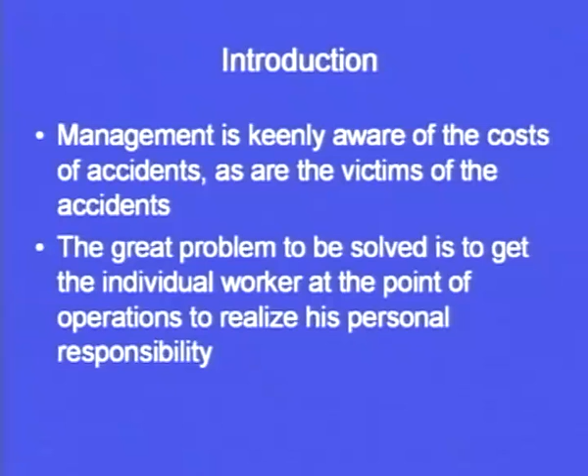There are direct costs involved and indirect costs involved. Whenever there is an accident, the person may suffer an injury, the machine may get damaged. So the management has to do the troubleshooting of the machine, or sometimes they may have to get a new machine. Similarly, they have to bear the cost of hospitalization of the worker. Then there are other workers involved in transporting that worker to the hospital, and in those cases too, man hours are lost and productivity is less. There are other indirect costs also, like the company may have to pay compensation to the worker, or insurance companies may come into the picture. So whatever we have discussed till now, there are costs involved in accidents, direct or indirect, and management is keenly aware of these costs.

And similarly, the person also knows that if he meets an accident, what is going to happen. He may sometimes lose a part of his body, which is completely undesirable from the company's point of view as well as from the worker's point of view. So this great problem has to be resolved. And how can this be resolved?

This can be resolved to get the individual worker at the point of operations to realize his personal responsibility. Although we have started the discussion related to industrial safety by saying that we have to lay out the system in such a way that accidents do not happen, the majority of accidents usually take place due to the negligence of workers or due to failure of equipment. So the first important point is the negligence of the worker.

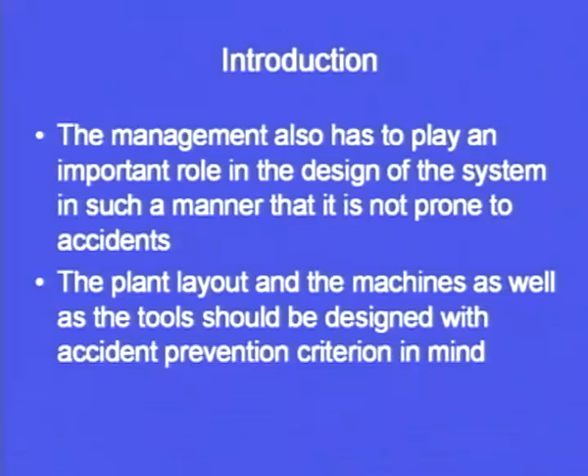The plant layout and the machines as well as the tools should be designed with accident prevention criterion in mind. So we should always design the tools, machines, and plant layout in such a way so that accidents do not take place. In subsequent slides we will see how these criteria can be incorporated into the design. These are simple things, but sometimes we do not give adequate attention to them.

Initially we will see that in a general layout, whenever we are putting the machines and other paraphernalia in place, what are the precautions and guidelines that we should keep in mind. So these are the general principles of a plant layout - what should be kept in mind whenever we are designing a plant layout.

If you remember in one of the lectures on facility layout design, we have seen the different types of layout - there is a product type of layout, a process type of layout, a fixed position type of layout. Also there are certain cells that fall under the category of cellular manufacturing or group technology. So we have seen different types of layouts.

The basic guideline we have seen is that there should be minimum transportation of material within the plant, because it adds to the cost, and as we will see here, it may also result in accidents. So we have to minimize the transportation of materials within the plant. The very first point on your screen: need to keep minimum distances for transfer of materials between plant or storage units to reduce costs and risks.

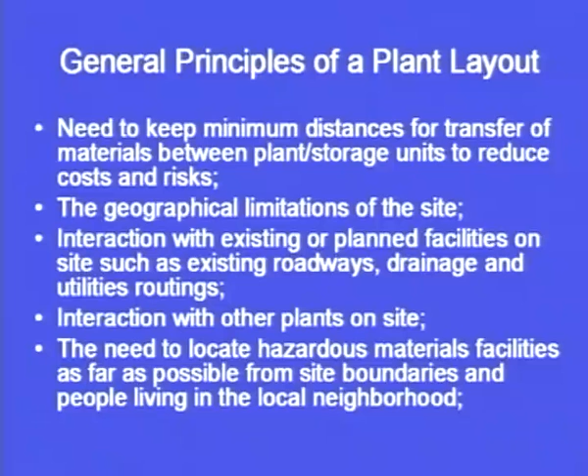Then there is the need to locate hazardous materials. Hazardous materials are those prone to accidents, fire, or explosion. So such facilities should be located as far as possible from the site boundaries and from people living in the local neighborhood. Wherever hazardous material has to be stored, it should be kept at a distance from the existing plant or from the neighborhood.

If you take the example of firecrackers burst during Diwali, these days the government takes adequate steps so that shops selling firecrackers are set up at a distance from the neighborhood or from where people are staying, because there are always chances of an accident or the risk involved is very high. The same principle applies in factories and industries: hazardous material should always be kept at a distance from the plant as well as from the site where people are staying.

Keeping in mind the principles of plant layout, we will further discuss some more important principles, like the need for plant operability and maintainability. We have to keep in mind what the operability and maintainability of the plant are.

There is also the need to prevent confinement where release of flammable substances may occur. Wherever such release happens, there should not be confinement - there should be adequate ventilation and open space so that flammable substances released into the atmosphere can find a path to go out. If they do not get a path to go out, there are always chances of fire or explosion. So wherever there are such chances, we should restrict confinement and make the space as open as possible.

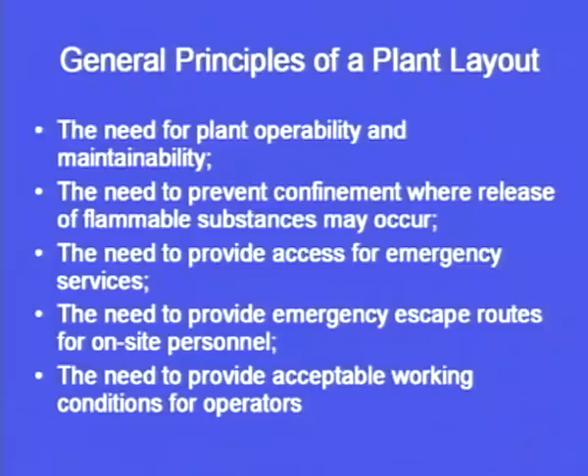Sometimes the humidity levels are very high, sometimes the heat that is generated is very high. So the important point is that the plant layout should be such that acceptable working conditions are provided to the operators. Sometimes the workers have to do some minute task, and if adequate lighting arrangement is not there, the worker may not feel comfortable, and his eyes may not last too long, or his eyesight may get defected or impaired. So whenever the plant layout or designing of the plant is done, this important aspect, the need to provide acceptable working conditions to the operator, should be addressed.

Now from a safety point of view, some important things have to be borne in mind, which we are going to see in subsequent slides. But the important point we have seen till now from the general principles of plant layout is that there are certain guidelines, certain principles. If we keep those principles in mind, then there are chances that the number of accidents that take place in a well designed plant are minimal, or very close to zero.

Now from a safety point of view, we have to prevent, limit, or mitigate, meaning lessen, the escalation of adjacent events, or the domino effect. So basically this point states that if one event happens, it should not lead into another event, and that event should not lead into a third event.

Suppose we take an example of cycles parked in a row. If we push one cycle, the first cycle will fall on the second, which will fall on the third, and similarly the whole row of cycles would be on the ground. We do not want that kind of condition, because whenever an accident, fire, or explosion takes place, it should not spread to other parts of the factory or other parts of the plant. That is the domino effect.

So we have to prevent it, or even if it takes place, we have to limit the extent to which it is going to cause damage. First, we should prevent it from happening. Even if it happens, we have to limit the extent of the damage, and otherwise mitigate the escalation of adjacent events. So if one event takes place, the other event should not take place. We have to put some barriers in between so that one event does not lead into the other.

So we have to ensure safety within the on-site occupied building. Occupied building means where people are present. So we have to provide safety for those buildings also.

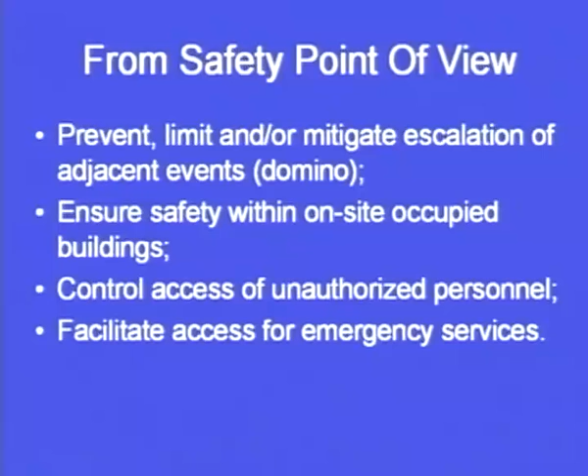Then, control access of unauthorized personnel, which is very clear, that only authorized personnel should be given entry into the plant. Then facilitate access for emergency services. We have already seen that point, that we have to provide access for emergency services. If an accident takes place, we should have an escape route, as well as access through which emergency services can go in, or fire tenders can go in, or the people who are going to take out the personnel from the plant should have adequate access.

Now let's talk about inherent safety, intensification to reduce inventories. So the first thing is we should only keep those materials in inventory which are required.

Sometimes there are certain things lying in the inventory which are not at all required, or which were required at some stage but are not required now. These may lead to certain kinds of accidents. So intensification means we have to keep a focus in order to reduce the inventories. If you remember our lectures on inventory management, excess inventory is never desirable. So from a safety point of view also, the inventory should be less. This is the first point if we want inherent safety in our plant.

Then substitution of hazardous substances by less hazardous alternatives. In designing the plant layout, we have seen that we should keep a separate space for hazardous substances. Inherent safety says that even if we have to keep certain hazardous substances, we should keep those which are less hazardous compared to the more hazardous ones.

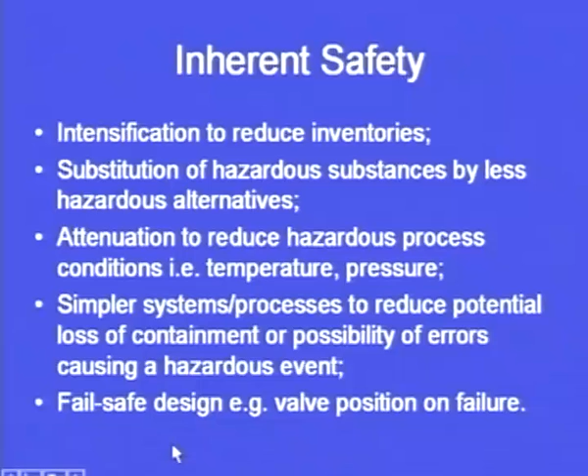So just to summarize, 3-4 points are there on inherent safety. We will carry forward this discussion in the next slide. First, reduce the inventories. Second, hazardous substances should be replaced with less hazardous substances. Then hazardous operating conditions should be minimized, temperature and pressure should be contained properly. Simpler systems and processes to reduce potential loss of containment or possibility of errors causing a hazardous event. There may be some loss that takes place because of containment, which we have to avoid. Then fail safe design, where we install sensors and valves in order to prevent accidents.

Then the inherent safety index is another important point we are going to discuss. There are different ways in which accidents may take place. We have to provide a particular system, for a particular working condition, in which accidents do not take place and operators feel safe in discharging their duties. But still accidents do happen, and then we have to have a quantified technique to check the risk involved in a particular type of system or process. The inherent safety index is the one by which whole process routes can be assessed, so the most suitable route for further development can be found.

So we always have to minimize the risk. This method also compares the inherent safety index of a plant with the cost of capital and production. It is believed that inherently safe plants are cost effective plants. There are risks involved and we have to minimize these risks. If we design the plant so that risk is minimum and accidents are less, these are the most cost effective plants, because we are not incurring direct costs of accidents, nor indirect costs, and therefore the plants are very cost effective.

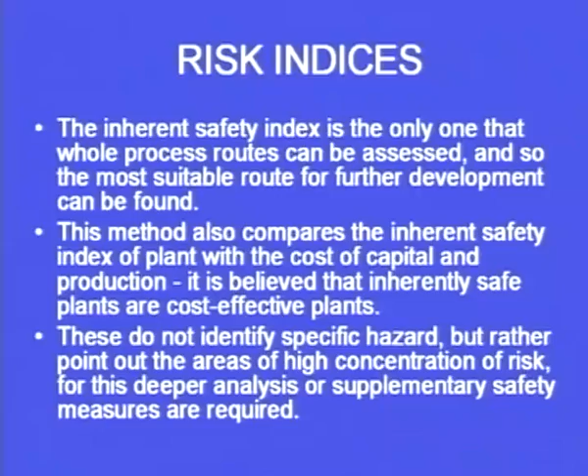These risk indices do not identify specific hazards, but rather point out the areas of high concentration of risk. For this, deeper analysis or supplementary safety measures are required. We would be able to quantify the areas where the risk is high, and wherever the risk is high, that area is prone to accidents, while wherever the risk is less, the chances of accident are very less. So these indices help us understand which areas we should focus on in order to reduce accidents in our plant.

These methods are quantitative and are fairly simple and quick to use. Quantitative means we will have some numerical value for these indices, and for different areas within a plant we will have different values for the risk indices, so we can check where the chances of accident are more and where they are less.

They cover range hazards of the material, process conditions and inventory. So we will get a range indicating that this material is hazardous to this extent, similarly process hazards and inventory hazards will give us the range in which they are going to be hazardous.

There is one such index called the Dow-Mond index, which highlights particular hazards and calculates various indices for fire and different types of explosion, plus an overall rating. Once we get the rating, we know the danger level or risk level in that particular area of the plant.

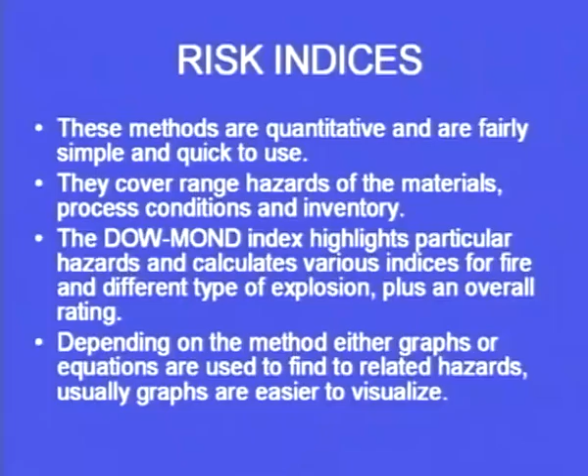So what has been said in these two slides is that there are certain quantitative techniques which can be used to assess the risks involved at different stages of the process or at different locations of the plant, and these indices would be helpful to us in order to understand the prevention of accidents.

Wherever the indices give us an idea that a particular area is prone to accident, we as management can focus on those areas and ensure adequate risk prevention or accident prevention policies and procedures are followed wherever the chances of accident are more.

So indices are very important, otherwise it would be all subjective in nature and vary from person to person. One person may say a particular machine is more prone to failure, another may say it is less prone, but to counter that subjectivity, objectivity is introduced into the system with the help of these risk indices, which help management take adequate preventive measures to avoid accidents.

Now, the domino effect we have already seen, explained with the example of cycles parked in a row. If you push one cycle, all the cycles would fall - one cycle pushes the other, which pushes the third, and all the cycles end up on the floor with the slightest push. That basically is the domino effect.

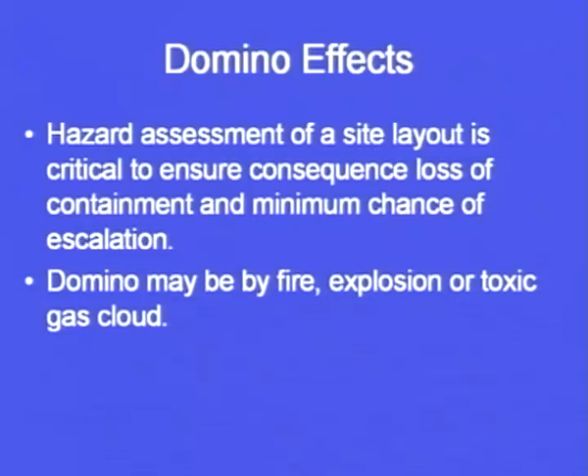So hazard assessment of a site layout is critical to ensure minimum chance of escalation. Domino effects may occur due to fire, explosion, or toxic gas cloud - domino can take place because of any of these reasons.

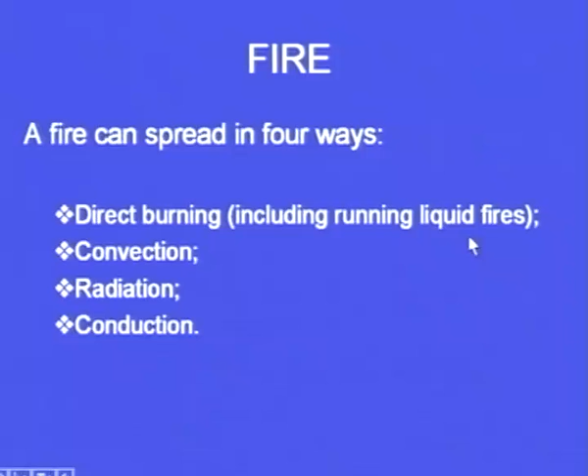Now we will see how these things occur and how they can be avoided. A fire can spread in four ways: direct burning including running liquid fires, convection, radiation, or conduction.

The spread of fire from its origin to other parts of the premises can be prevented by vertical and horizontal compartmentalization using fire resisting walls and floors. So basically compartmentation is going to help. If we have a very large hall and one area catches fire, the fire is bound to spread to the complete hall without such compartmentalization.

But if we have different compartments and the whole hall is divided into 5 or 6 different compartments, and fire takes place in one particular area, then if we have fire resistant walls as well as fire resistant roof, that fire would be contained in that particular compartment only. It would not spread to the other compartments.

So the spread of fire from its origin to other parts of the premises can be prevented by vertical and horizontal compartmentation using fire resisting walls and floors. It can be divided into different compartments, and this would help us arrest the fire that has taken place in any particular area of the plant.

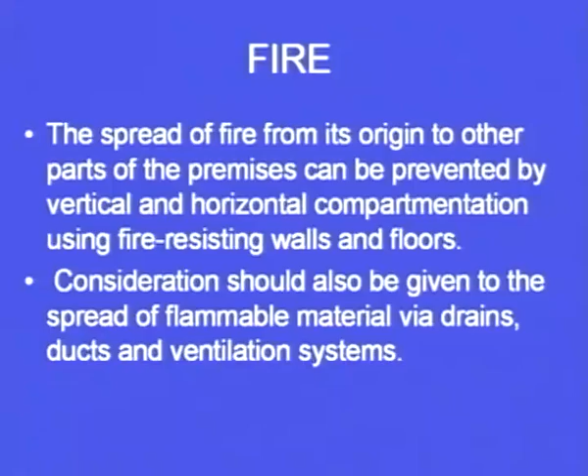Then consideration should also be given to the spread of flammable material via drains, ducts and ventilation systems. So if fire has taken place in one area, it can go to the other area through the drains, or through the ducts, or through the ventilation system. So that also has to be avoided, and that consideration should be there whenever we are designing the building or the plant.

Delayed ignition following a release may result in spread of flames through such systems via dispersed flammable gases and vapors. So these are some of the domino effects, that in one area damage or fire has taken place, and how it is going to spread to the other areas, and that we have to arrest and check. So we have to check the flammable gases and vapors from causing fire in the other areas.

Then protection against domino effects by convection, conduction and radiation can be prevented by inherent safety principles. We have already seen the inherent safety guidelines, and if we follow those and lay out the plant accordingly, then the domino effects because of conduction, convection and radiation can be avoided, or the extent of the damage could be minimized. So other methods such as active or passive fire protection measures may be considered.

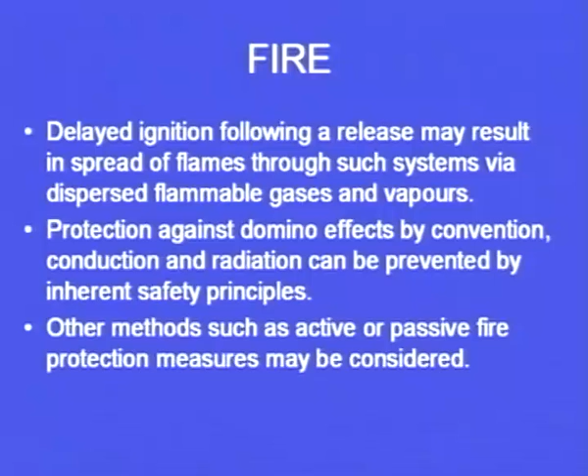So we will see what are these active and passive fire prevention measures, and what are these active and passive fire protection measures. We have to check that the fire does not spread. So use of fire extinguishers or water sprinklers constitute active fire protection systems. So this is very clear.

Fire extinguishers all of us have seen, water sprinklers also we have seen. So these are the active fire protection systems.

Passive fire protection system includes coating of fire resistant insulating media or insulating material applied to a vessel, a steel surface, or a firewall. So we can coat the surface or firewall with fire resistant material. That is the passive fire protection system. An important criterion in deciding which system is most appropriate for fire exposure protection is the likely duration of the exposure to fire.

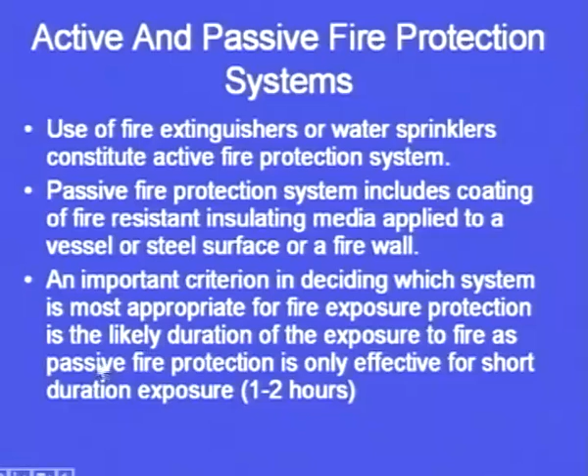Passive fire protection is only effective for short duration exposure. So we can see that if the short duration exposure to fire is there, maybe 1 to 2 hours, then the passive fire protection is only effective. And if the fire is for long duration, then we have to go for the active fire protection system.

The following site factors should be considered in determining whether active and passive fire protection measures are required. We have to see certain points when making this decision, like the fire hazard posed by the substance - what is the hazard, what is the substance that is burning, should we go for active or passive, or what are the chances of the material that we are storing.

If it is a very hazardous material, then we have to decide whether active, passive, or a combination of both is needed. Toxicity of substances and smoke produced is also a criterion which we have to bear in mind while deciding on the active or passive fire protection system.

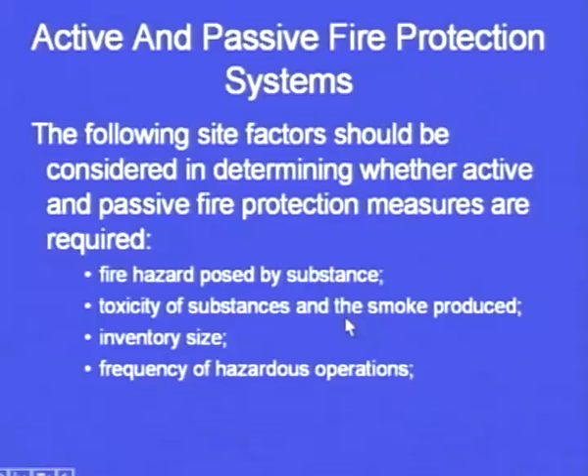Similarly, inventory size - what is the size of the inventory? If the inventory size is very big and the fire takes place and we are not able to arrest it quickly, then we have to go for active fire protection systems like sprinklers. But if it could be contained in half an hour or 45 minutes, then we may even think of passive fire protection systems. Frequency of hazardous operations is also an important criterion, as well as the distance to other hazardous installations and the available access to fight fire.

We have to keep all these things in mind whenever we are taking a decision regarding active and passive fire protection systems, whether we have access to fight the fire or not. If we do not have access, or water sprinklers cannot reach to pour water, then we have to go for a passive fire protection system. The firefighting capability of the on-site emergency response team has to be borne in mind, similarly the response time for the nearest fire brigade, as well as the resources available with the fire brigade. So all these things we have to keep in mind whenever we are going to fight against the fire.

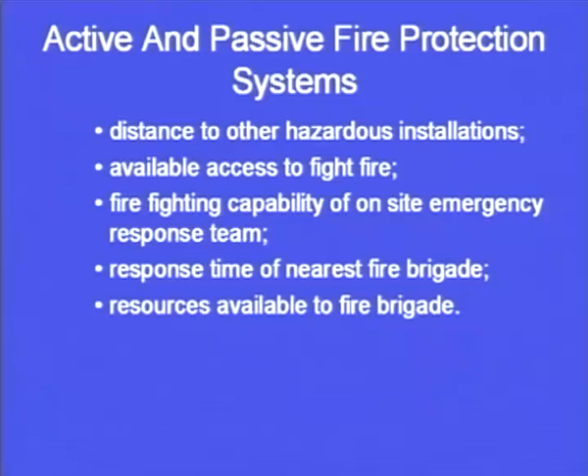Now coming on to explosion, we have seen how fire takes place, and we have to bear in mind guidelines which help prevent fire, as well as what kind of fire protection system we should put in place, active or passive. Similarly, we have to take into account certain guidelines when designing the system to be safe against explosion, so that if explosion takes place, the plant or system should be safe. The explosion propagation may be directly by pressure waves or indirectly by missiles. So we have to see how the explosion may take place, and what principles or guidelines we should bear in mind when designing a plant or building that is safe to explosion.

As for fires, we have already seen inherently safe methods that help prevent fire. Similarly, for explosion also we have to see what these methods are. Arranging separation distances such that damage to adjacent plants will not occur even in the worst case is the same kind of inherent safety method we considered for fire. There we saw that fire may spread to other portions through radiation, conduction, convection. So we have to check that this does not happen in case of an explosion also, and those things have to be arrested.

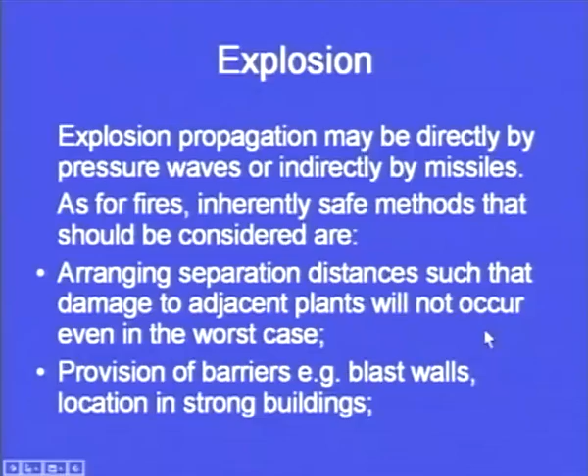Provision of barriers, for example blast walls, and location in strong buildings. We have to provide blast walls which would prevent the explosion from transferring from one part of the building to the other, as well as location in strong buildings. So we have to provide adequate safety measures, valves, sensors, or accident control devices which would not allow the explosion to cause havoc or cause extensive damage.

Protecting the plant against damage, for example provision of thicker walls on vessels, is another important point for avoiding damage due to explosion. Directing explosion relief vents away from vulnerable areas, for example other plants or buildings, roadways near site boundaries. So we have to provide explosion relief vents, and these vents would help avoid the damage that may be caused due to explosion.

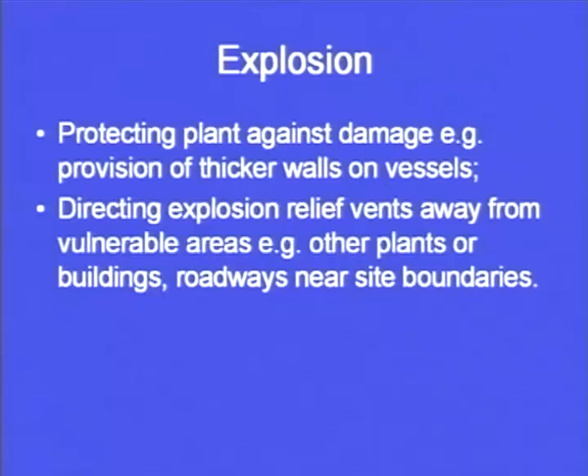Now another kind of hazard or accident that may take place is due to toxic gas releases. Toxic gas releases may cause domino effects by rendering adjacent plants inoperable and injuring operators. Basically, if there is a toxic gas release, that is going to cause an effect on the adjacent buildings, adjacent plants, adjacent sites, as well as the operators working in the vicinity may also get affected. So that kind of domino effect has to be arrested.

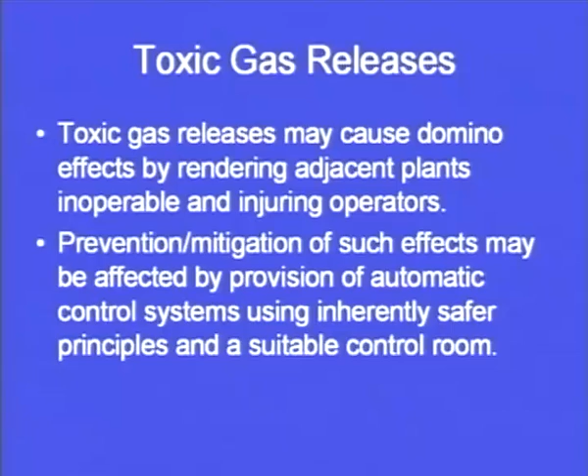Preventing or mitigating such effects may be achieved by provision of automatic control systems using inherently safer principles and a suitable control room. Basically we have to arrest these kinds of damages or hazards, which happen because of the release of gases. So how can we check? We can have a control mechanism or sensor in place which senses that some leakage has taken place, and it would automatically generate an alarm making personnel aware that some kind of gas release or toxic gas release has occurred and should be plugged in. If they are able to plug the leak in the shortest possible duration, then the control mechanism is very effective and the damage would be minimal or prevented.

Reduction of consequences of event on and off site. First, locating all high volume storage of flammable and toxic materials well outside the process area, which is very clear. Also, locating hazardous plant away from the main roadways through the site, so hazardous plants should be kept at a distance.

Fitting remote actuated isolation valves where high inventories of hazardous materials may be released into vulnerable areas. This is a control mechanism to avoid accidents from storage of hazardous materials. Then, provision of ditches, dikes, embankments, and sloping terrain to contain and control releases, preventing gas or liquid from spreading from one side to the other.

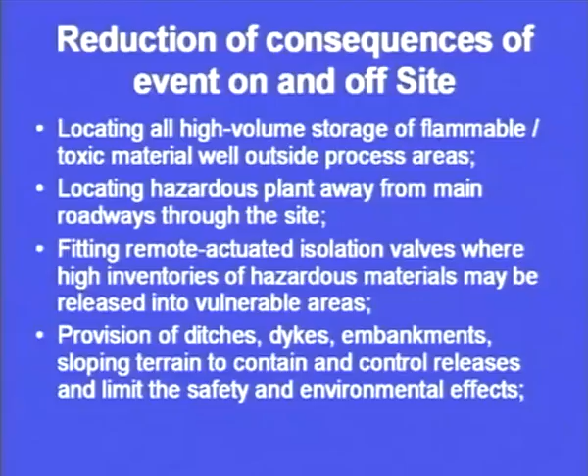This limits safety and environmental effects and minimizes damage. So this is about reduction of consequences of an event—an event has taken place, and we aim to reduce its consequences both on site and off site.

Carrying forward the discussion on reduction of consequences of events on and off site: siting of plants within buildings as secondary containment. The buildings act as secondary containment, while the primary containment is the plant itself.

Siting of plants in the open air ensures rapid dispersion of minor releases of flammable gases and vapors, preventing concentrations from building up which may lead to flash fires and explosions. Plants should be sited where open air is available, so even slight releases of toxic gases or flammable substances escape to the atmosphere.

But if open air venting is not available, the flammable or toxic substance builds up within the plant atmosphere, and in some cases this may cause a flash fire leading to an accident, or even an explosion, which must be avoided at all costs. So we must provide for open air ventilation.

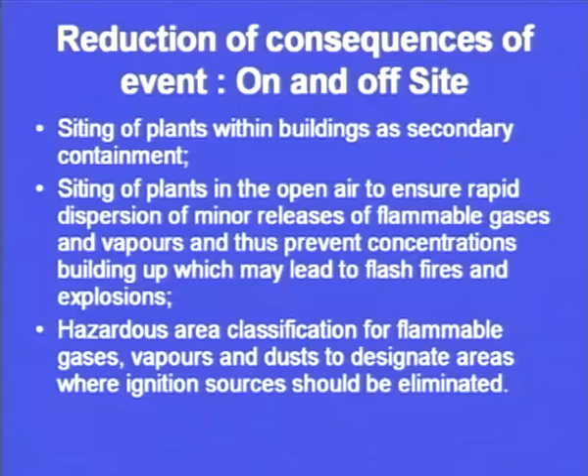Hazardous area classification for flammable gases, vapors and dusts designates areas where ignition sources should be eliminated—wherever hazardous materials, gases or vapors are present, we must avoid ignition sources; fire and lighting matchsticks must be avoided. For example, at a petrol pump, we are always advised not to light a cigarette or a matchstick, because the area is such that it may lead to a fire.

Now, positioning of occupied buildings. When considering industrial safety, where should buildings be positioned? The distance between occupied buildings and plant buildings will be governed by the need to reduce the dangers of explosion, fire and toxicity. We have seen that hazards arise from explosion, fire, or toxicity, so this distance is dictated by the risk involved in these factors.

In particular, evacuation routes should not be blocked by poor plant layout—recall we started today's lecture with plant layout considerations on how to lay out a plant to minimize accidents. Personnel with more general site responsibilities should usually be housed in buildings sited in a non-hazard area around the main entrance.

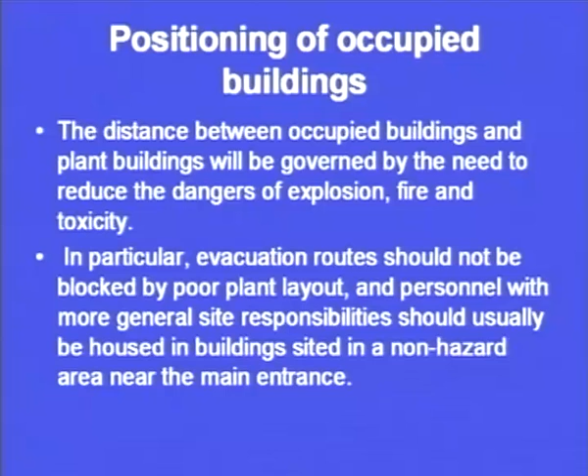So the first point is clear: evacuation routes should not be blocked by poor plant layout. And personnel with general site responsibility, such as company officials, should usually be housed in buildings located in a non-hazard area near the main entrance—people higher up in the hierarchy should be located near the main entrance, which is quite debatable.

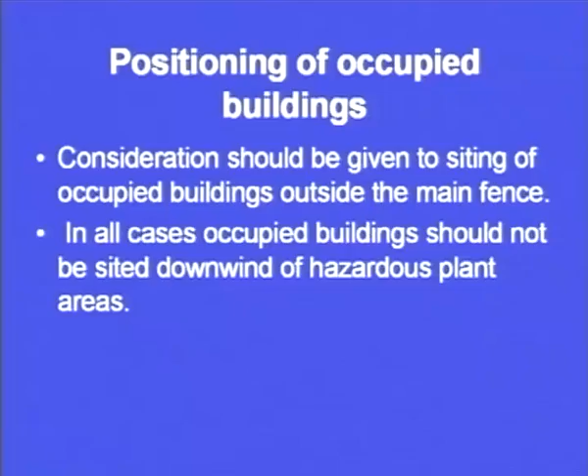Positioning of occupied buildings. Consideration should be given to siting of occupied buildings outside the main fence. In all cases, occupied buildings should not be sited downwind of a hazardous plant area, because a domino effect may take place: a fire in the plant could, with the wind, be transferred to the housing area or occupied buildings. That has to be avoided, and it's an important consideration to bear in mind.

Now, aggregation and trapping of flammable vapors. Building design should be such that all parts of the buildings are properly ventilated, either forced or natural. Ventilation should always be there, otherwise the trapping of flammable vapors may lead to flash fires at any particular moment. To summarize, building design should ensure proper ventilation, forced or natural, which is a very important point.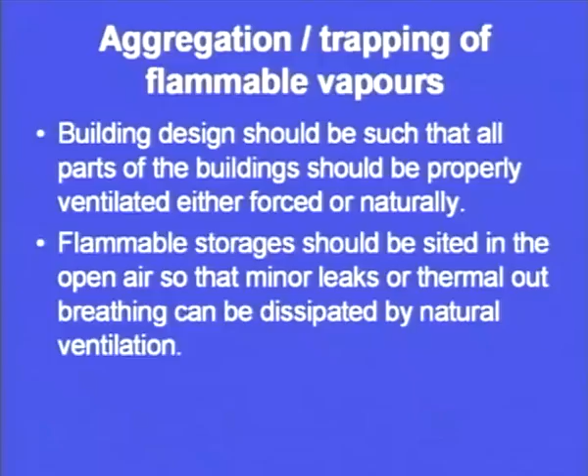Flammable storages should be sited in the open air so that minor leaks or thermal outbreathing can be dissipated by natural ventilation. Sometimes thermal outbreathing takes place—some machines, while in operation, release heat to the atmosphere—so we have to provide for dissipation of that thermal outbreathing.

Flammable storages should be sited in the open air. Wherever there are flammable substances, those should always be located in open air, or there should be proper ventilation, so that even minor leakage of gases or vapors does not build up, which may lead to flash fire. These two points are very important to keep in mind, as they may lead to a very big accident.

Segregation of incompatible substances. The following issues may contribute towards a major accident or hazard: failure to understand the properties of substances handled. Sometimes we are handling substances used in the industry without knowing how to handle them. Although precautions and guidelines exist, a new person joining a company may not understand how to handle a particular substance, and wrong handling may sometimes cause accidents.

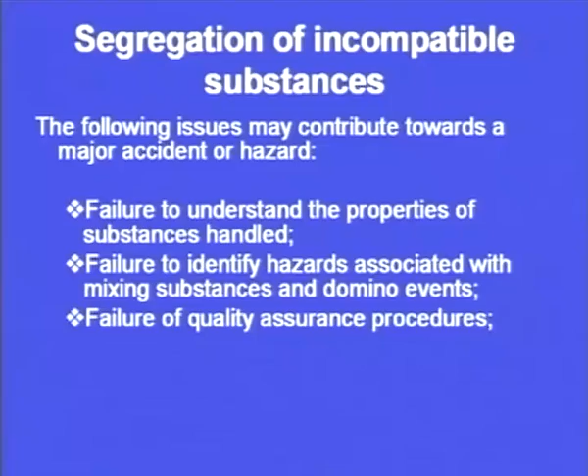Similarly, failure of quality assurance procedures. We get some substance but don't ensure its quality. If we don't ensure quality, it may be poor and result in fire, explosion, or release of vapors leading to complete failure, or a toxic gas release causing a big hazard or accident. So segregation of incompatible substances is also very important.

This addresses the needs of inventory management, where we have to manage materials and substances so that they do not lead to accidents. So failure to understand the properties of substances handled, failure to identify hazards associated with mixing substances and the domino events thereafter, and failure of quality assurance procedures may sometimes lead to accidents.

We have seen the various causes of accidents—fire, explosion, toxic gas releases—and the inherent safety principles and methods that should always be borne in mind when designing plant layout. We have also seen the guidelines for laying out a plant, and for buildings, that proper ventilation should be there, and there should not be a build-up of vapors or flammable gases which may result in flash fire. So I think today's lecture gives an overview of the hazards associated with running a plant, and the principles engineers should bear in mind to avoid these accidents. Thank you.